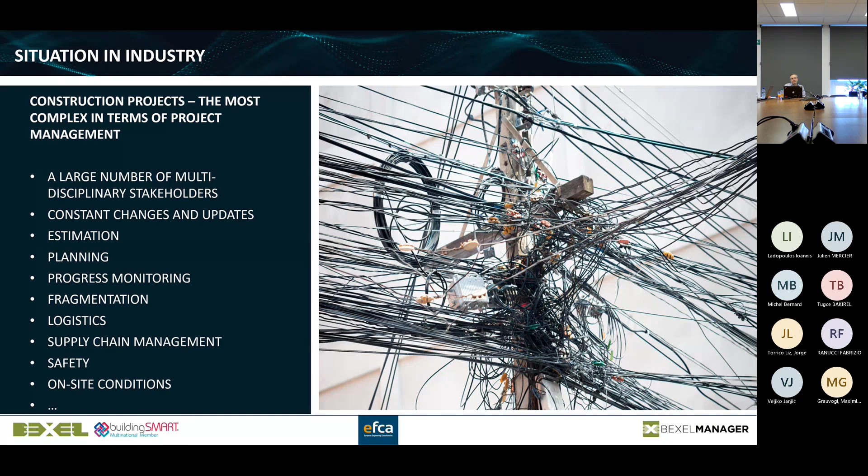And because of that, today, unfortunately, the construction industry is not very efficient. Not because engineers are not professionals, but because it's extremely difficult. Of course, any task could be very simple or complex. Let's say painting a wall is a very simple task, but to manage all these tasks, it's almost impossible.

Jeff mentioned Finland. So just one example of current productivity in Finland, and they are maybe one of the best countries in Europe and in the world in terms of efficiency. In one research they put sensors to see how efficiently workers are actually performing the works on site. And the number is, believe it or not, 15%. The theoretical maximum is around 70%, because there is always some waste, and that's where we are today.

And what do you mean? From 100% of work possible, they do only 15%. The rest is waste. There is certain work which is necessary for preparation, let's say you prepare your ladders for painting, or you bring the material from the ground floor to the second floor. There are certain activities which are not included there, but there are a lot of things where people are on hold.

So there are a number of reasons. More contractors at the same time, at the same location, long sequences of activities, wrong details. So you have to solve clashes on site. You need an additional elbow, so you need to wait a couple of hours for that. We always believe that drawings are not updated, the information sent to the site is not updated. So a lot of things.

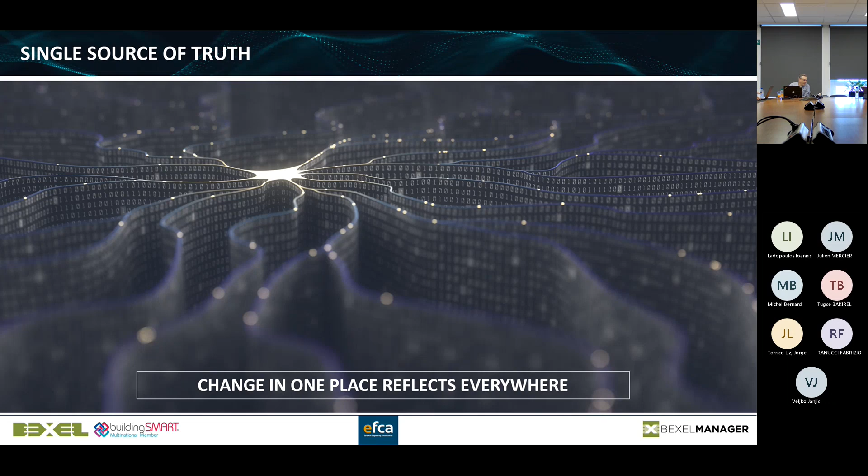There are a lot of bad things about this, but I would like to move forward now and focus on the single source of truth concept, where we are today, and what the challenges are of today's risk management, insurance, contract management and so on.

So this is now... yeah, now you can all see there is a lot of text here, and I just want to say that these are the last two slides I have with a lot of text.

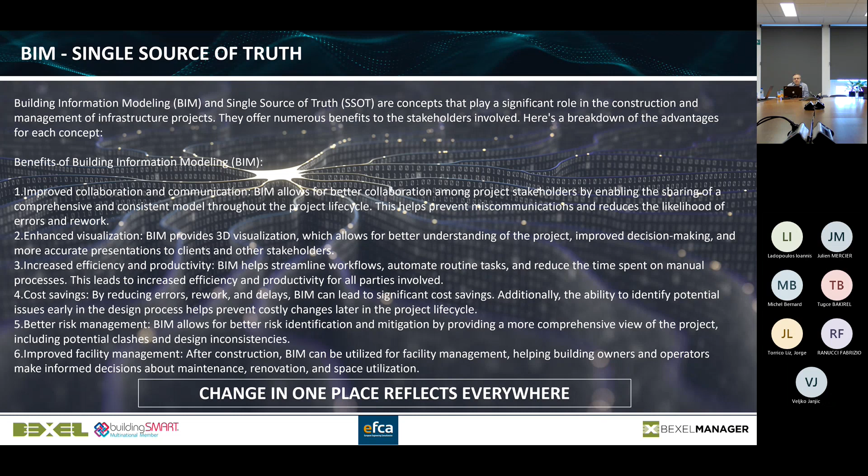So what are the benefits of BIM and single source of truth? There is enhanced visualization, improved collaboration, cost saving, better risk management, and a lot of other things. Both this page and the next one were actually not produced by me, but I asked ChatGPT to tell me what it believes. I was surprised that even ChatGPT mentioned a lot of things which we all honestly believe will help us if we have a single source of truth.

First of all, they said BIM and single source of truth use almost the same concepts, and this is very beneficial. He also mentioned data consistency and accuracy, streamlined decision making, reduced errors and rework, enhanced collaboration, simplified data management, and improved auditability and traceability. If I can wrap it up, I'll say if something is coming in a proper format from a single source of truth based on a proper workflow, I will trust that data much more than if it's coming from even a good engineer who just signed off that it is okay.

So just to give you an example about document and data management: even 30 years ago, we had a workflow where I, as the main engineer, should sign that all drawings are coordinated, and I'm formally liable, and it's okay. But what is the possibility that I'm wrong?

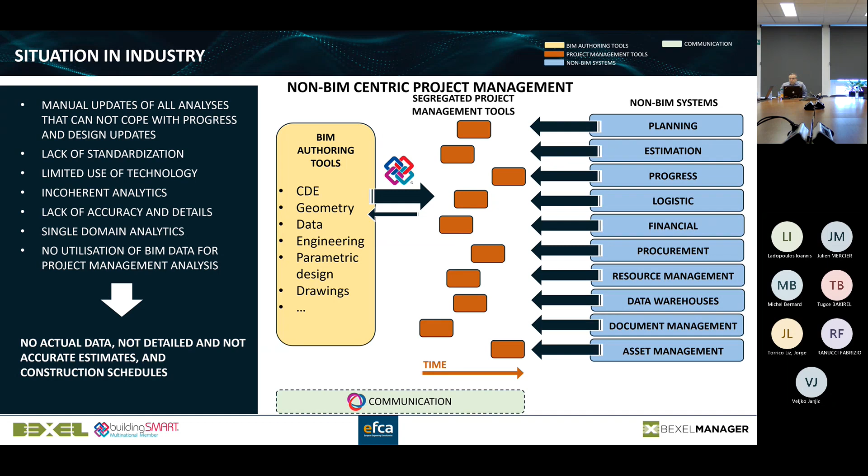The idea is to have, as much as possible, unified tools where most analysis comes just in time from this enhanced system - not necessarily just BIM, but from a single source of truth. What does that mean? Whenever you update something, it's immediately going to update all respective analysis.

The key question is... You mean, sorry to interrupt, just to follow - you mean all aspects are immediately together in the same model, they stay active? Because you have different time frames - procurement is later than pre-design, then you have the planning, other aspects, the documents they refer to - that all stays together? Is that what you're saying? Yeah, as much as possible.

So the key question is, do we know if we are talking about a single source of truth or not. If you change something - let's say add a sprinkler on the ground floor - the key question is: is the clash detection going to be updated? Is the data check going to be updated? Is the bill of quantities going to be updated? Is the cash flow going to be updated? Is the resource management going to be updated? Even the drawings - if all this is updated, we are talking about an ideal single source of truth.

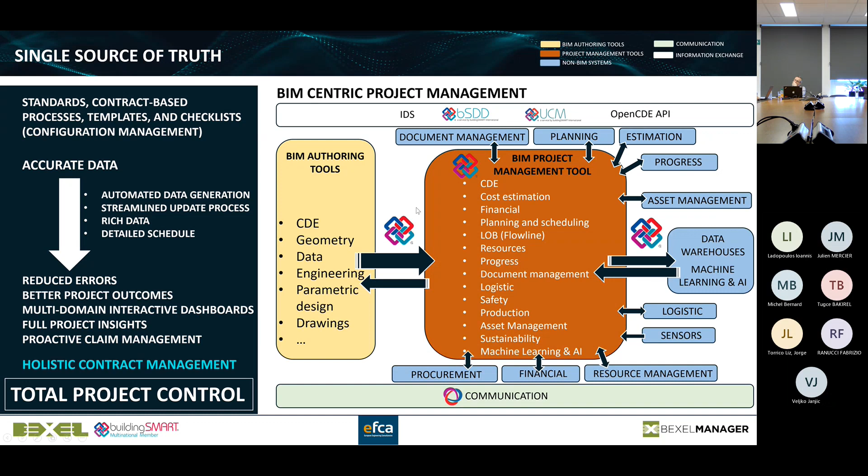Of course, can we always have everything? No. But today, this is not too expensive. Of course, we cannot solve everything, but if we can get 80-90% of the most important things for us sorted out this way, we are winners. And the truth today, unfortunately, is that we don't have those approaches too much. I'll give you an example of the other challenges and how this could be sorted out, so at the end there will be some solution, which is good news.

First of all, how do you evaluate the value of data based on the workflow? I personally always ask: what is the workflow and how is this data generated? I carefully listen to this, and based on that, I say, okay, the risk is this.

The second important thing is, when something changes - and this is always happening on a project - how fast can I have the new information. It's like cost estimation: my cost estimate maybe is brilliant, but when I update something, I will never have updated information. I said, okay, this is a huge risk for me - I cannot have additional works, claim management, and so on done properly. So in order to have successful systems, we need timely information.

So the rule of thumb is how fast we can produce the information. The value of information, if I have it today, is 100. If I have it in a week, it's 30. If I have it in a month, it's 10. If I have it in 2 months, it's 0.

And that's sometimes even negative, because if in 2 months I realize what I did wrong, I could even be disappointed because I know why I received that information late. So what should be done, I'll explain at the end what we can put in the contract. Luckily, a lot of these things could be put in the contract, in the scope of works.

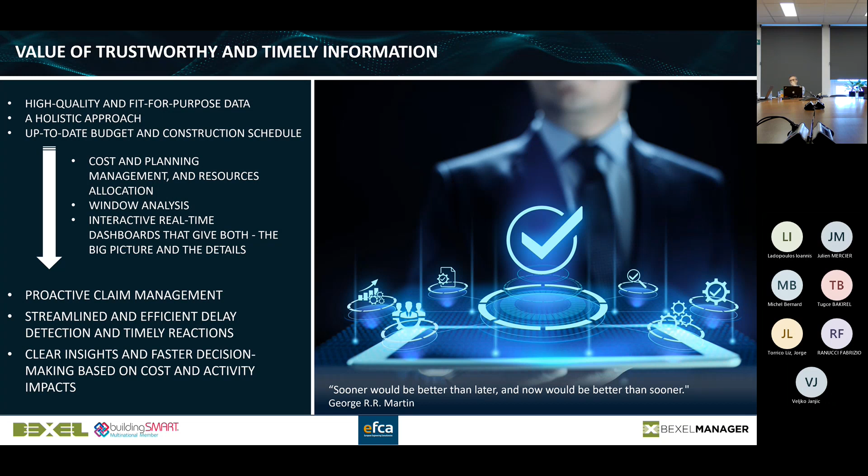What is also very important, in order to have timely information, is to have as much as possible machine readable requirements and as much as possible automated workflows. Without them, it's simply not going to work. So I can give you an example.

There's a project in Norway where we are also involved, a large infrastructure project. Every Monday morning at 7 a.m., they update 1,000 IFC files in 11 projects without even opening software, and produce a clash report, data check report, dashboard, and bill of quantities. For me, this is end of the game. If we can have those processes, then we could focus as engineers on intelligent things.

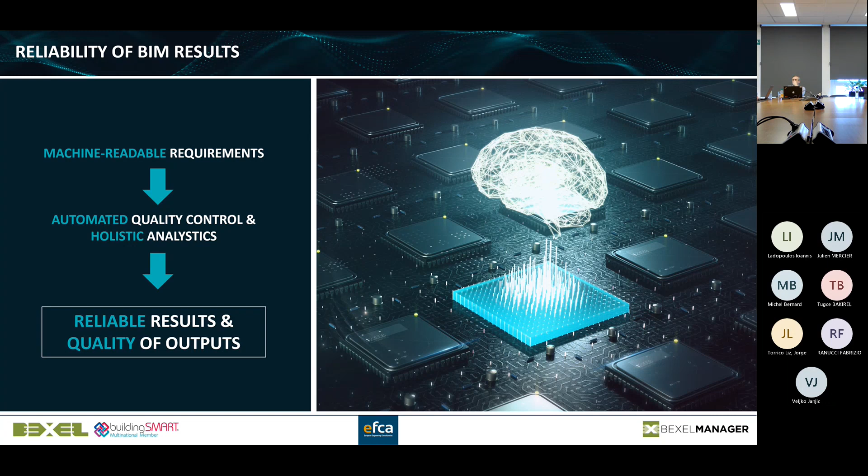What is also an opportunity is that some of the clients and designers who adopt some of these principles I'm mentioning now gain a significant advantage with the clients, because they trust them much more, since they simply have much better control.

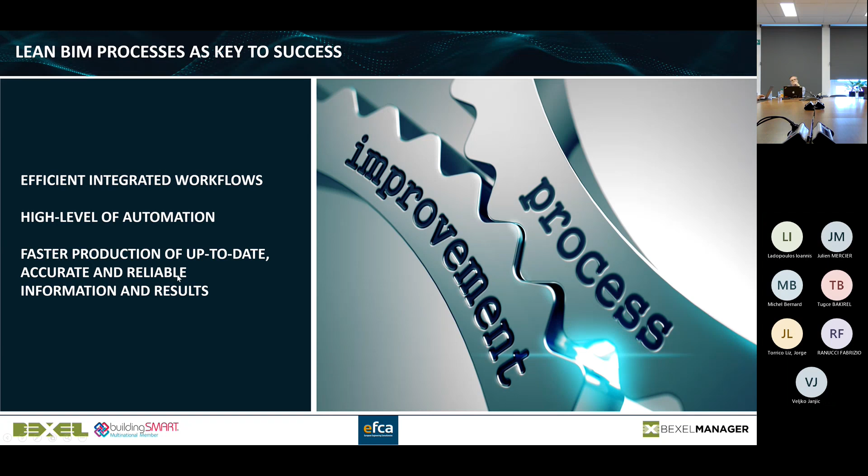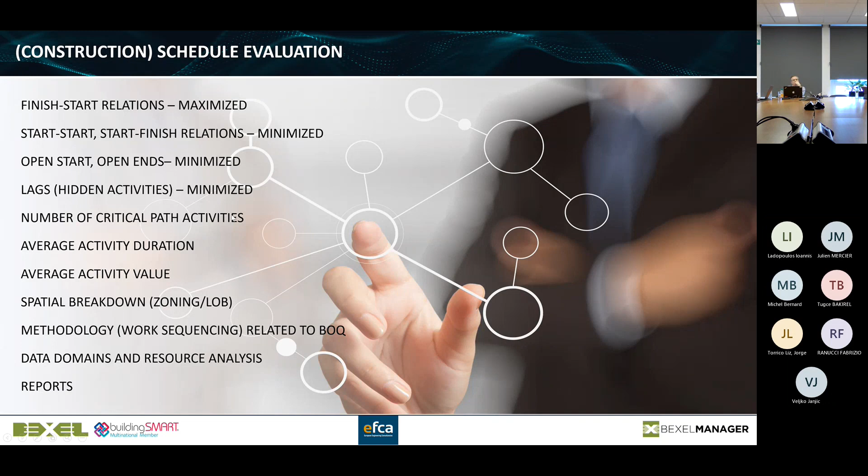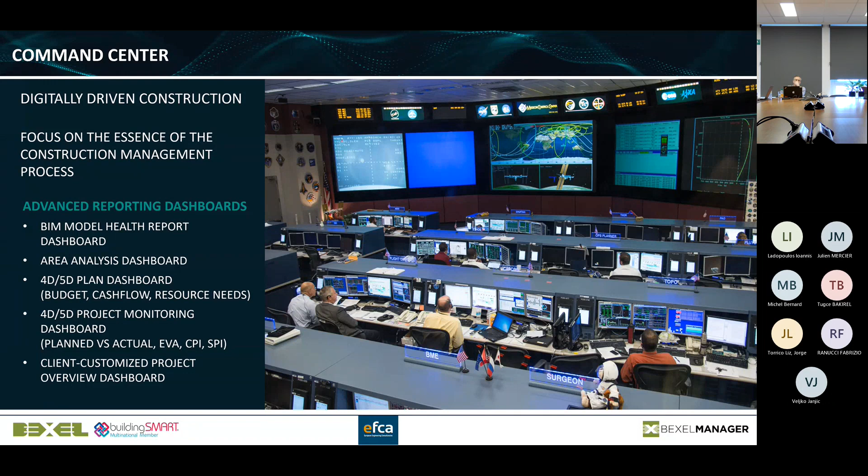So now let me show what we have to do in order to have this. These are the ways we can automate. This is an example of how a construction schedule can be evaluated automatically, and so on. These are the ideas for certain dashboards produced in a timely manner for the client.

So to give you an idea of what can be done: first of all, can we share all the single source of truth data at the same time to everyone? It's not going to work, because the performance of those dashboards or analytics is going to be impossible. The performance is not going to be there.

The second question is, do I really need to look at everything at the same time? No. So that's why, based on the entire single source of truth, the idea is to automatically create subsets of the data I would like to deliver. For example, if I have a huge building, maybe I can say just a substructure area, or parking area, for clash detection purposes.

One example we have now in Slovenia: let's say 40, 50 kilometer tunnels. We don't want to analyze all of them at the same time, we don't even want to load all IFC files at the same time. This is a common misconception - we just load one tunnel and analyze it. So first we define what are the spatial subsets.

The second is the property subsets. For example, today we originally load entire IFC files, and with this we analyze hundreds of properties, but maybe for a certain analysis we just need 10 of them. We can define which properties we would like to analyze. The third is systems - maybe we would like to analyze just structural works, so why load all utilities as well?

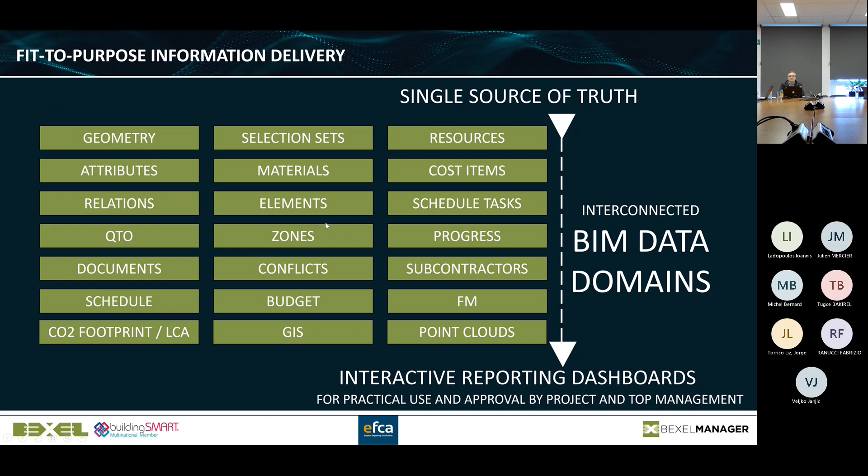And last but not least are the data domains - clashes, and I will show you now all the data domains available: geometry, materials, element zone, facility management, carbon footprint, schedule, documents, cost items, you name it. These are everything which exists.

And here are the dashboards - I'd like to give you a glimpse of how these dashboards are produced, and I'll show you live maybe one or two examples of how it can work. In this case, for example, we are doing a property data check. We would like to see if certain mandatory properties are really in the project.

We can just define the subset of the models we would like to analyze, not necessarily the entire project. Then we can automatically run this data check and see, with green, red, yellow, or purple color, what data is missing. The idea is that you can have that dashboard immediately, let's say at 7 a.m., and know what's happening. You can define which buildings and which systems you would like to check.

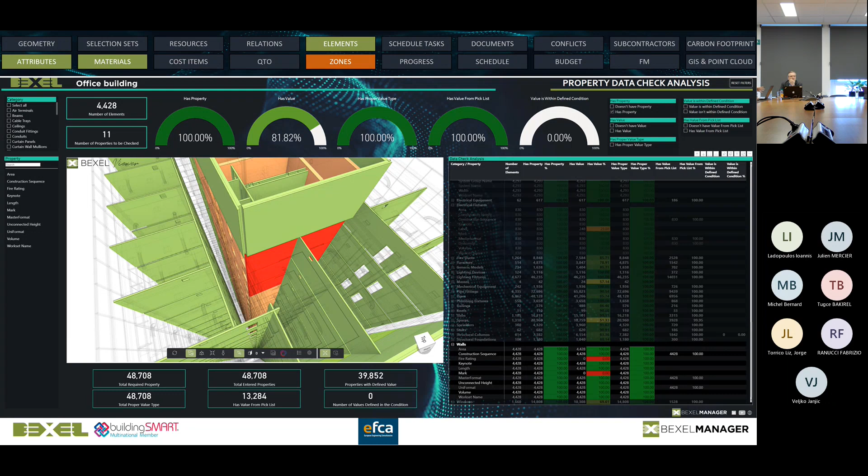And the idea is that in the future it is not going to be mandatory to sign the document, but to sign or to approve the dashboard. So that gives you much more possibility to control. On the other side, it also gives you a requirement to analyze certain things in a slightly more professional manner. The same goes with area analysis.

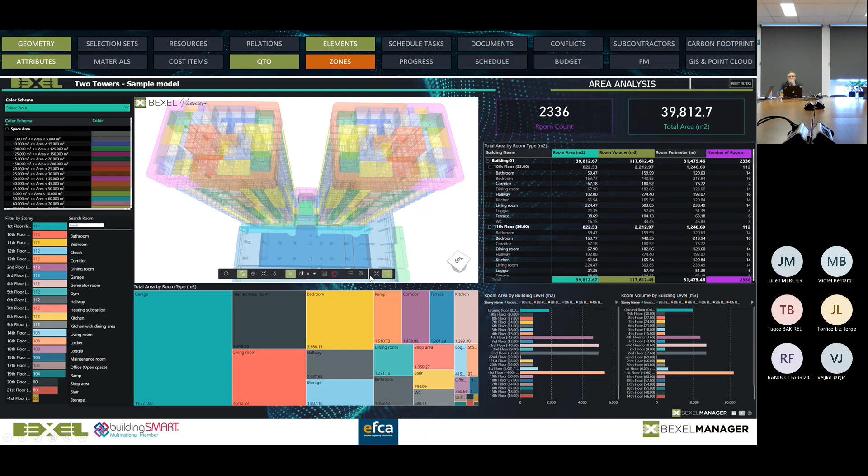So we have building floors, different room types of the project, various color coding schemas, and we can immediately see the areas and analysis of the last version of the project. The third one, quantity takeoff. These are utilities. I can have various color schemas, slabs, work sets, and I will show you live in a couple of minutes.

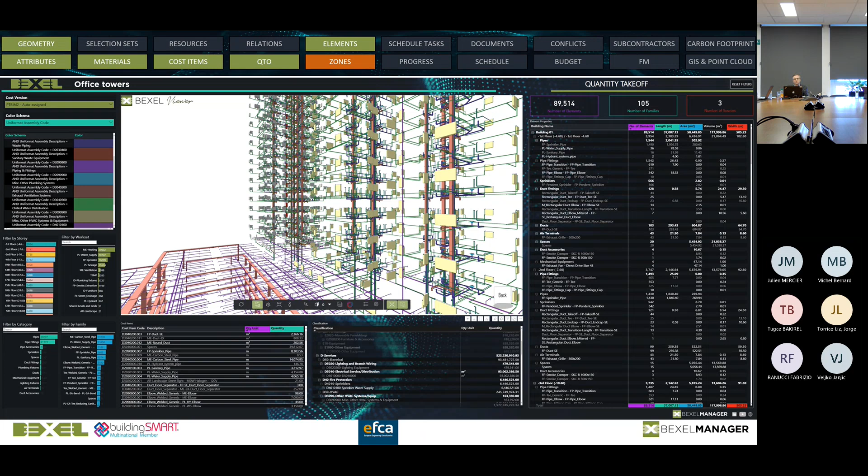So you can play around with this dashboard, but you know that this is produced today, and it has to be approved. This is the latest version of the detailed design phase, and this is the subset of the data you have to approve. And of course, this is clash detection.

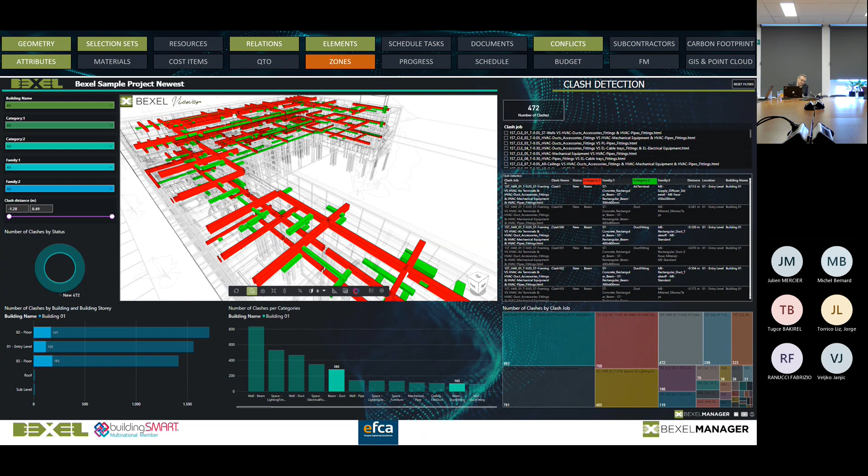So I don't need to have, as a user, a clash detection tool. I need to see a dashboard. If I'm the supervisor, if I'm the client, I just need to have a dashboard. We are talking not about the tools that produce the data, but what presents it. So again, this can be done automatically, and again, we are winners. And I have to say, a lot of tools have these automation modules today which allow you to do all these things automatically.

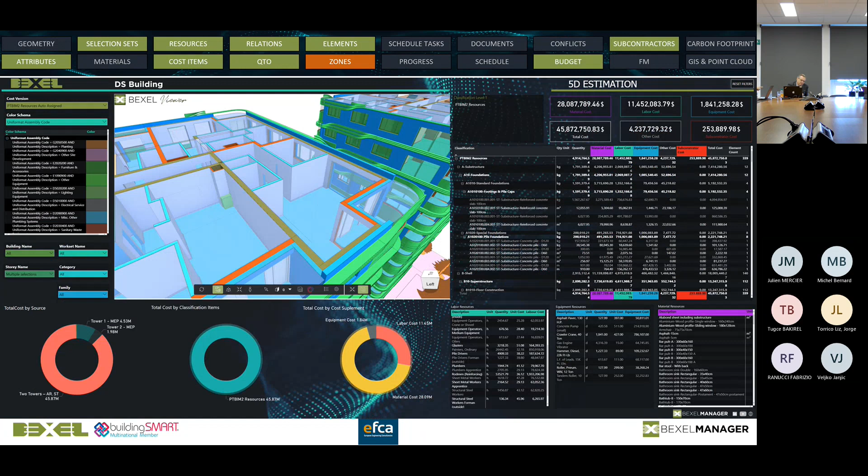The next thing is the estimation. I will maybe show you live the difference between a traditional cost estimate and this cost estimate, where you can easily identify what can be done. This is progress monitoring. Again, this is an example where you can see visually what's done each month, isolate each month, and see visually all the bill of quantities done that month.

So if you have a proper workflow, and this dashboard generated just in time, you will trust this data much, much more than a manually submitted Excel document. So the idea is that this is what is now possible, and this is how the approvals are done. And then you can combine this according to any criteria: per system, per subcontractor, or any other way, and immediately see different dashboards automatically generated.

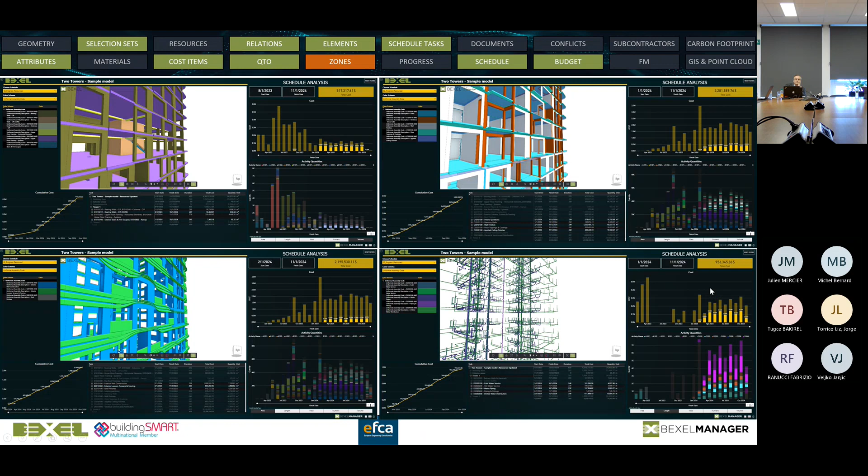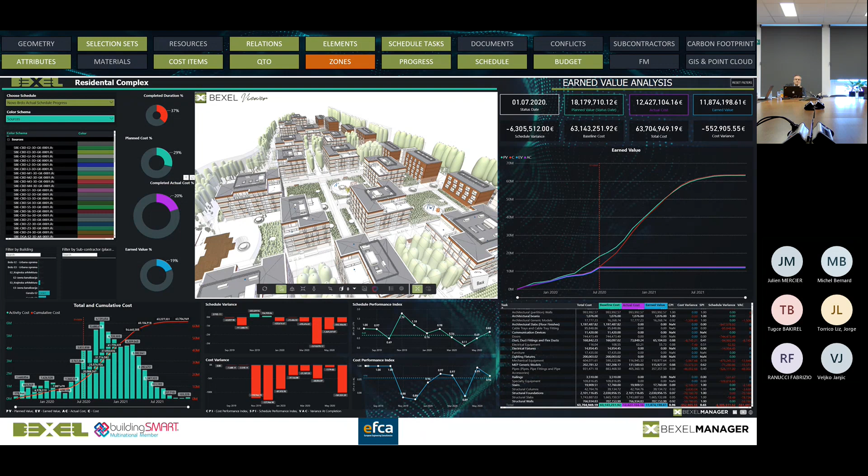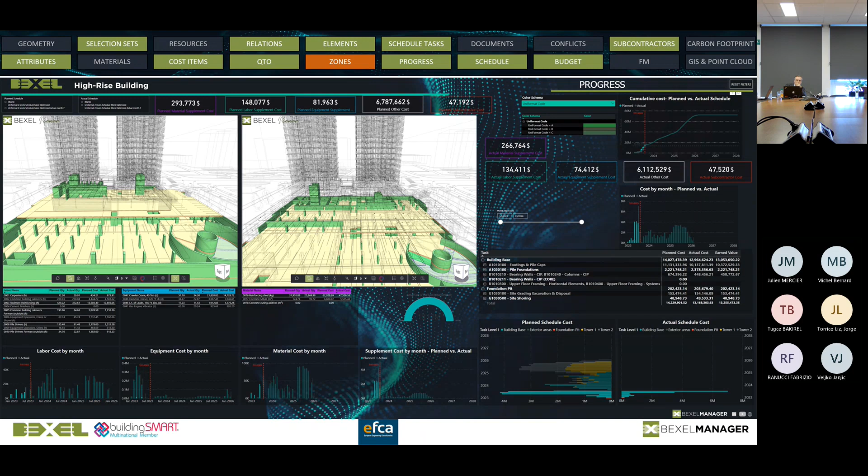And this is, for example, what is even more difficult, earned value analysis, where you as the client make profits, where you're losing money, what the expected cash flow is until the end of the project, and so on. This is a monthly payment certificate for a certain project, and this is a dashboard for planned versus actual. So the idea is that you can combine all this and approve them instead of just manually approving documents.

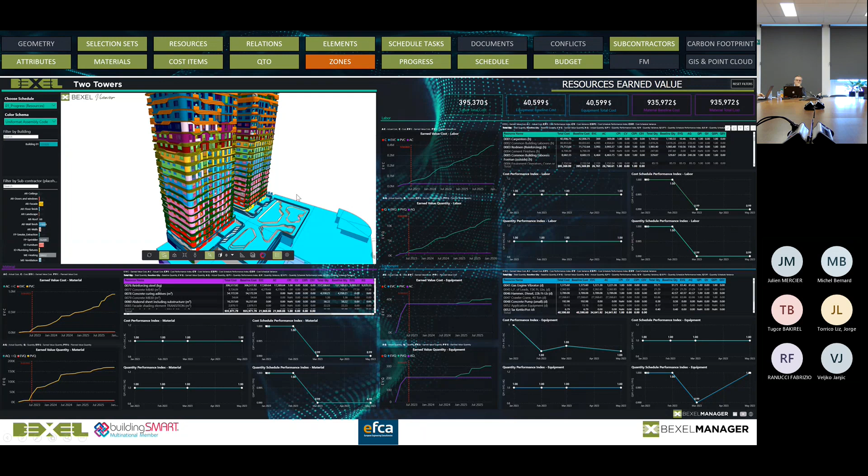And these are resources. So just to wrap this up, and maybe I will show you a couple of these examples. The key is who creates the data, how the data is generated, whether this can be done in real time or almost real time, and based on that, we expect lower risks and lower premiums in the future, because we will trust the data much more. And of course, there is a workflow and everything. So these are the benefits: effective process, lower risk, lower insurance, and so on.

So how can this be adopted? It is already done on a lot of projects with the proper scope of work and the proper deliverable formats, and the clients are usually on the safe side if everything is done in that manner. So before we go on, I will show you an example of certain items.

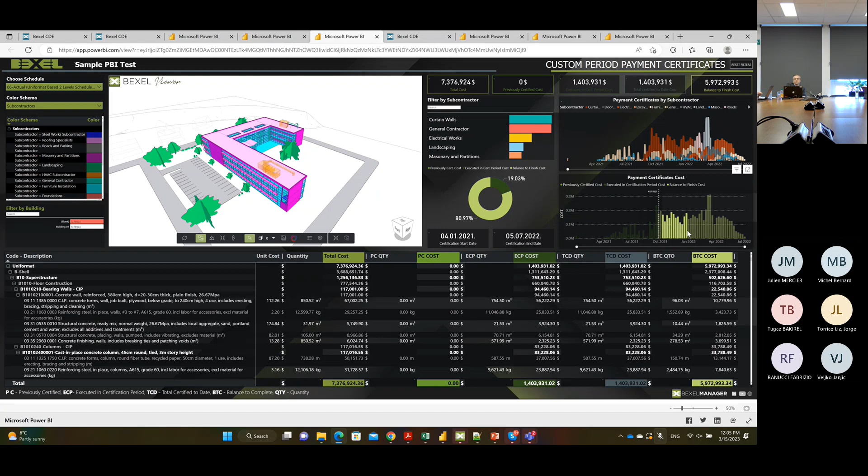So if I identify this each week, in this case just by clicking on one element here, I will see everything done in that particular period, week, day, month, and so on. I can visually see everything that is done. I can visually see the total amount of money. I can see how it reflects the contract.

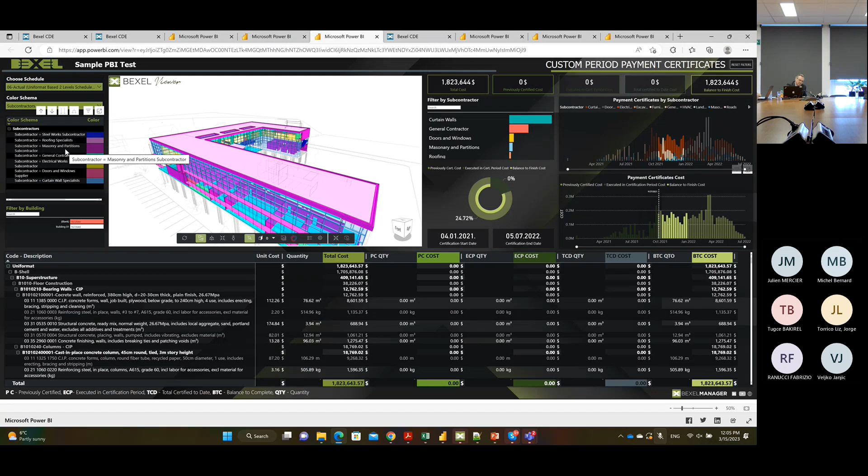And then if I want to see just what the masonry and partition guy did, I can click here and see his amount of money for that certain period. So if I have this, I can have immediate feedback, trust this data much more, and lower the risk.

The same goes with, let's say, this project sample from Germany. If I want to see how it is going, I can see per German standards, in this case category, I can see a color schema, and I can isolate any type of element I have in the project. Let's say I choose Fenster, for example, and the system will show me what is the cost of all elements here. So I can visually see them and see if I forgot something or not.

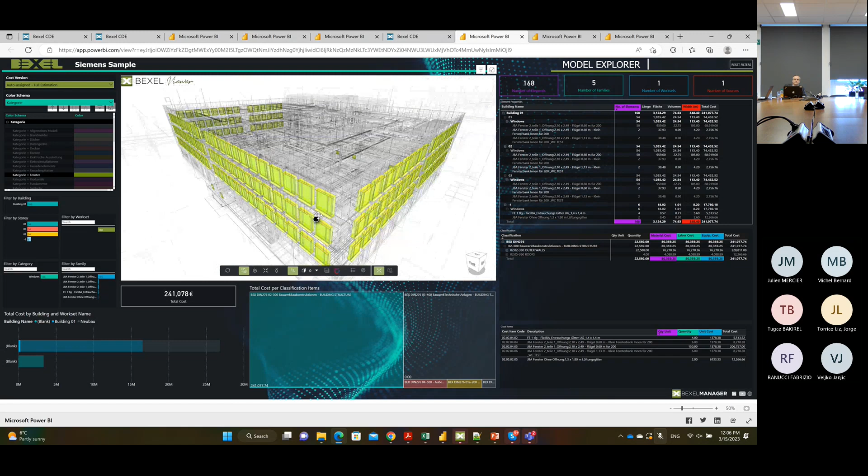So the idea is that with all this, I can trust the data much more, and I, as the stakeholder, am ready to pay the premium because the data is organized in a proper manner. The same goes for data checks, the same goes for property checks.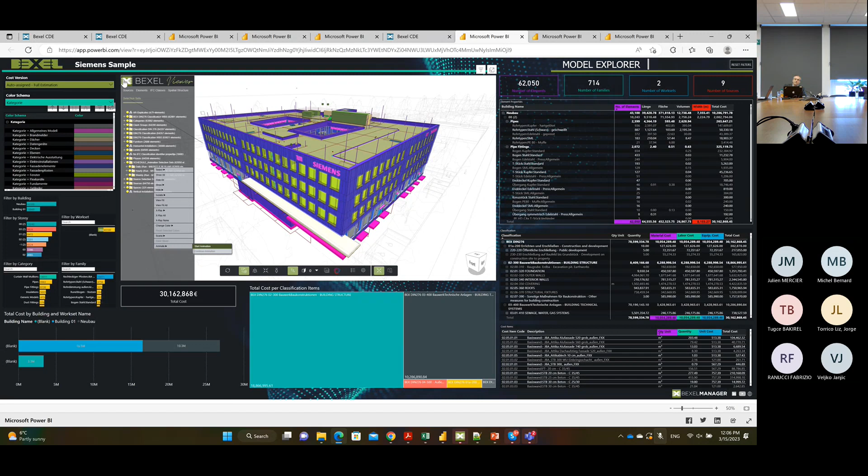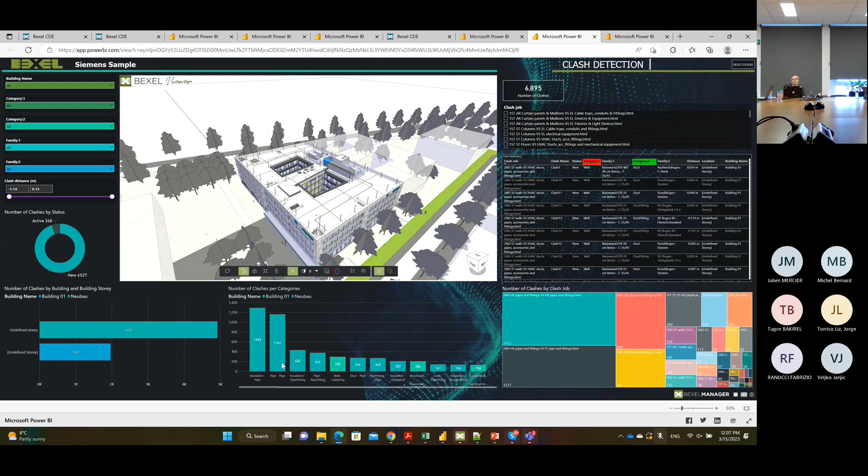Now I will show you, if the internet connection is good, a very smooth simulation. The internet is not great here, but live it's a very smooth simulation, so I can see how the project is going to be built. This is clash detection. I can see all the clashes in the project, per zone, per building level.

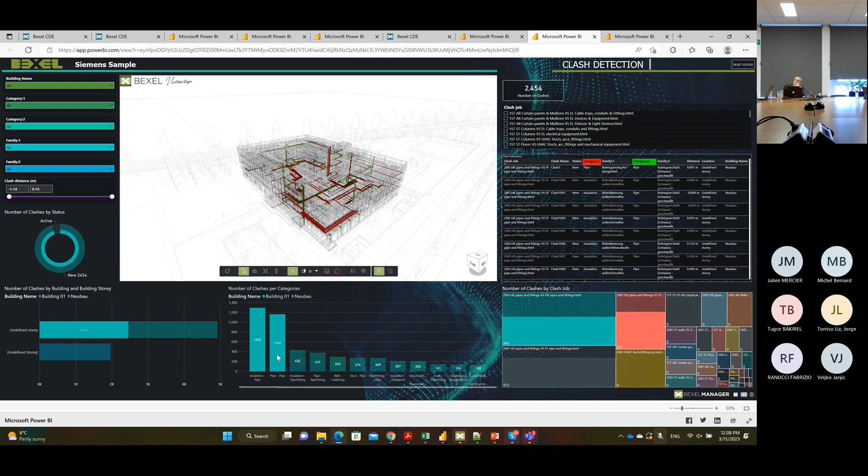So the idea is that if you can produce those types of dashboards and analysis just in time, you can trust the data much more, and the value of information is higher. The vision is, instead of delivering a single paper document or PDF, to deliver a subset of information, certain zones, certain data, certain dashboards, and that information has to be approved. The value for all stakeholders is much better. So this is the relationship between the single source of truth concept, risk management, and contract management.

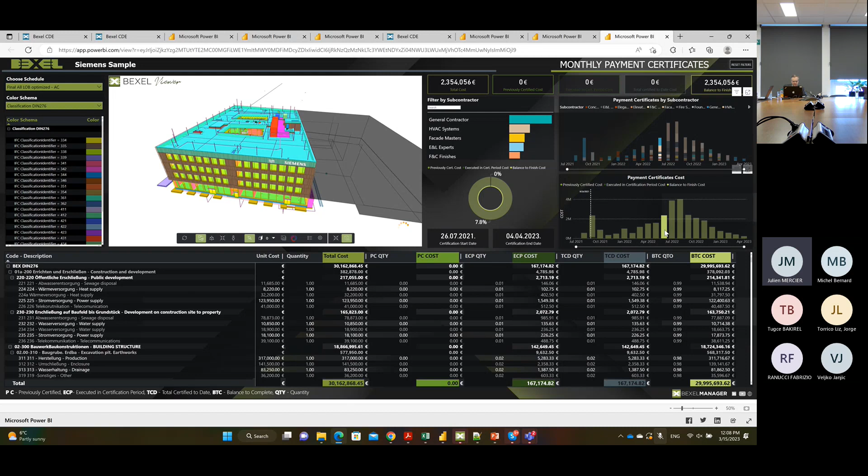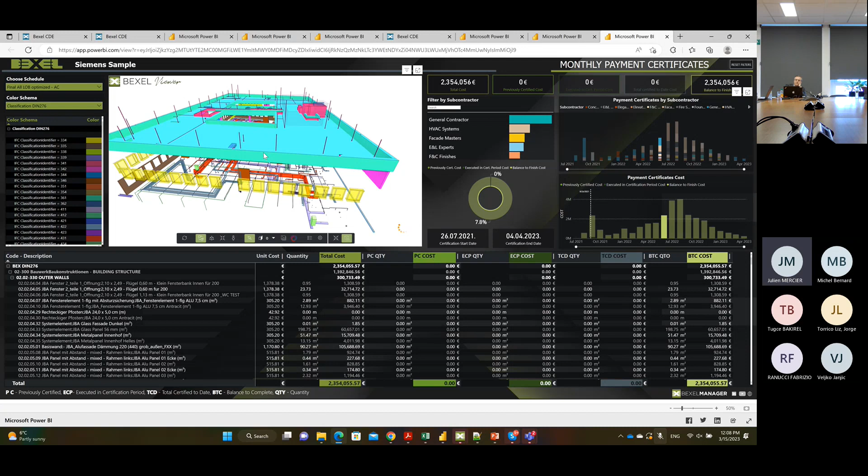So do you have any questions? Comments? Yeah, it's Julien from France. It's a very good product. We do the same thing, in fact. Did you use Forge? No, this is BEXEL, in this case the BEXEL viewer and CDE manager. So it's similar, maybe with some benefits, but more or less it's a BEXEL viewer. Okay, because you have to convert. In fact, you convert IFC files into a database, JSON or no?

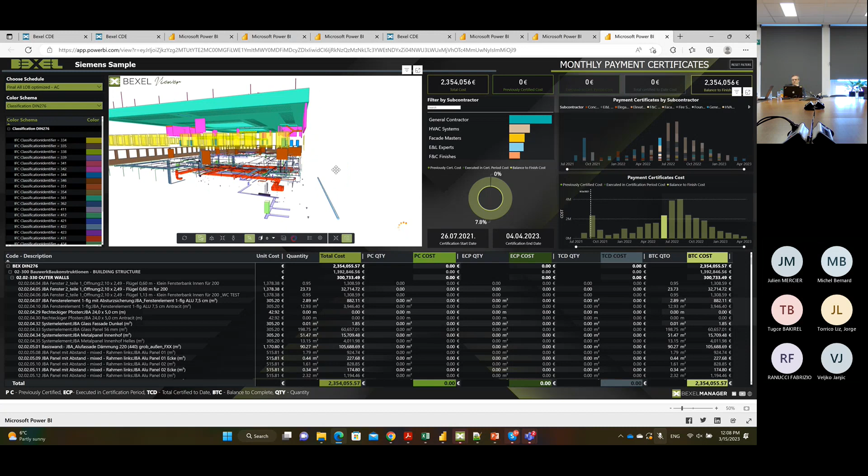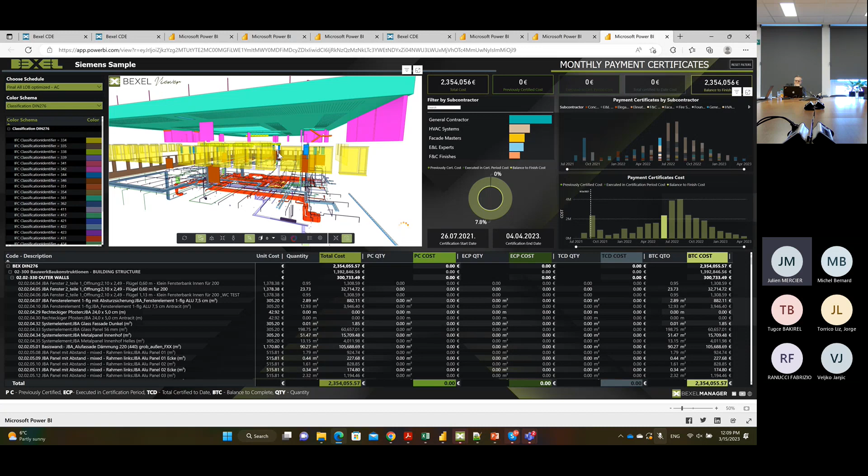Not just that. This is one part, but as you know, a lot of data is missing in IFC. So you need to combine various data sources, it could come from an ERP system or any other system. Unfortunately, IFC is not sufficient. Because, for example, if you want to query an IFC for spaces or properties, you need to convert it into a database like SQL or JSON and so on. You create your own converter? Yes, of course. We have our own, similar to what Autodesk or Bentley have.

Okay, and after that you connect it to Power BI, for example? Yes, the key is where the data is. In this example, Power BI was used because when you create this dashboard, Power BI automatically creates a very efficient OLAP cube with just a particular subset of information. So performance is great, and you can use this on our CDE, where you have a lot of projects, models, and so on.

The idea is that if you use Microsoft, in this case SharePoint, you can even define the workflow, so who is approving each of these dashboards. And if Microsoft Power BI is used, the benefit is that a lot of additional customizations of each dashboard can be done directly in SharePoint. But one way or another, the idea is that the data is fully open. Everybody could access it, and of course whoever owns the data has control over how it is used. Please go ahead if you have any additional questions.

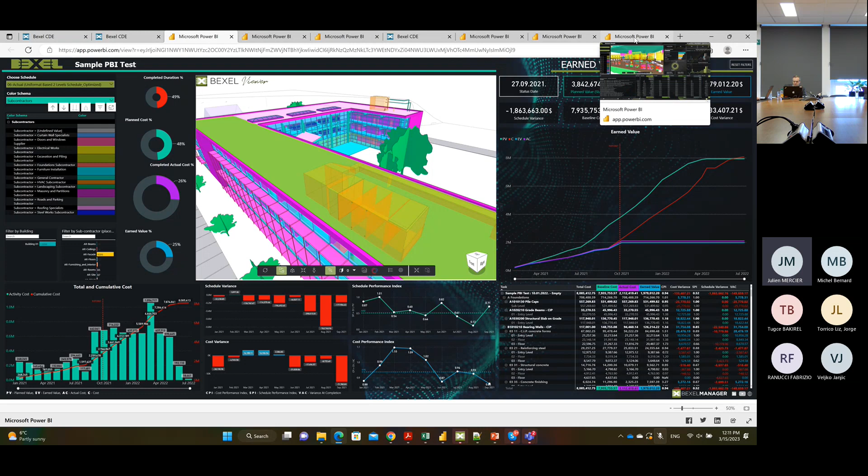I have another question, a very important point for us. It's to explain that a common data environment is not a common data environment. In fact, it's a common file environment because, as I say, if you upload IFC files into a CDE, you can't query all the data, and you need to convert them. And it's a big deal, in fact. In the common data environment, you just have a file and not data.

Data is very different from an IFC file. An IFC file is a database, in fact, of database objects. And it's very important to have all information, all data, with the relations between each element. Then you can do what we can see on the screen.

And it's very important to make the difference between IFC file and data. It's a big deal. Yes, that's what I use in my slide, that you define a subset of IFC files, subset of properties attached to them, subset of systems. So maybe you would like to see just structural works or MEP works or everything, and then subset of the data. So everything is the common data.

Unfortunately, today's misconception is that you have a viewer, let's say a CDE, which is just a basic viewer of the models, and then you have literally an added document management system, and it's called common data environment. Unfortunately, this is not true then.

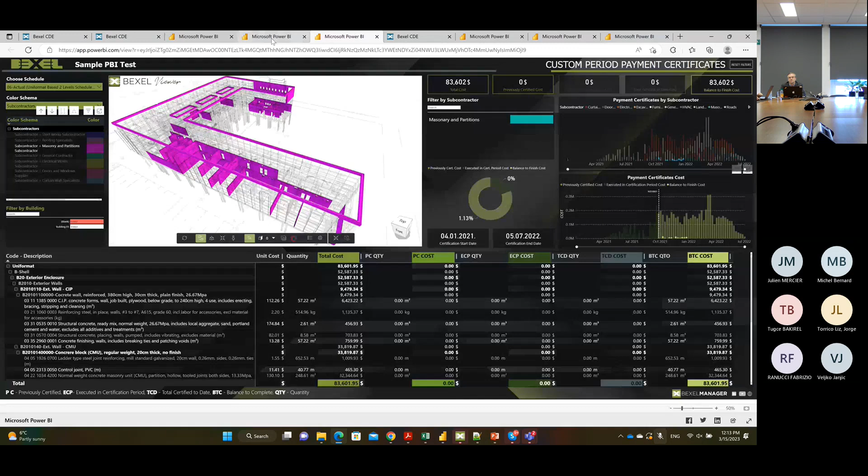Because what I wanted to say also, one example how you can test the accuracy of the data. So if I have any model, and I would like to verify how the data is generated, let's say I'm going to just find any of the projects here, just to go to the cost. If I click on the single element and I see its cost, in this case 18,000, I know that it is bottom-up analysis and it is very accurate.

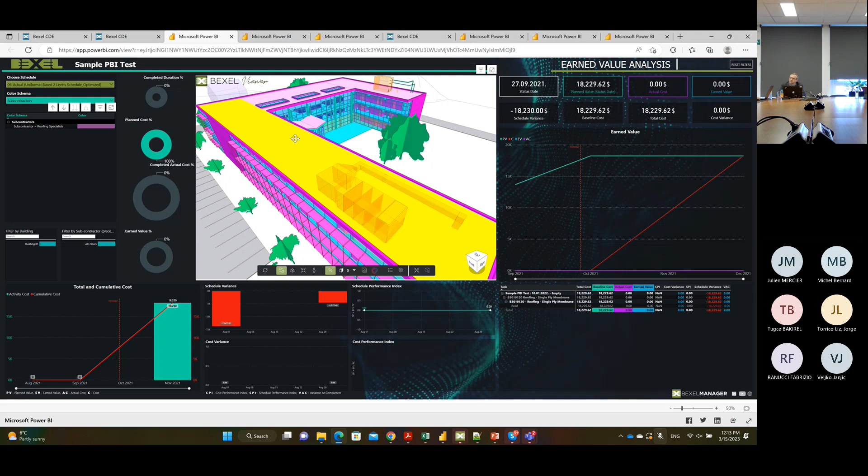If, on the contrary, those walls and windows cost 5 million, the accuracy of that information is quite low. So one of the tricks or ideas is that data should be attached to the element itself or to a minor group of elements. Otherwise, we are talking about a top-down approach where a lot of mistakes could happen. So this is an example.

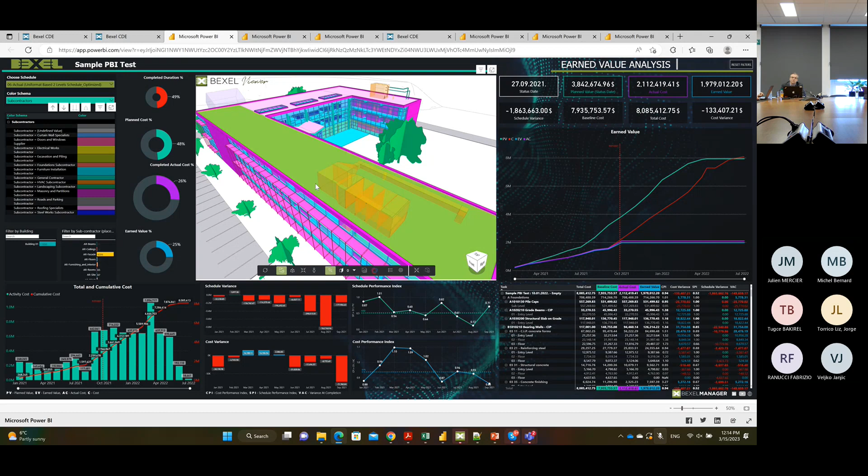So I know in Power BI you can combine any data, but the problem is how this data is generated. This is the key difference. So this is so that you can justify how the information is done. Otherwise, if you have, just go back to this slide. This is very important. So maybe you can answer this question to me.

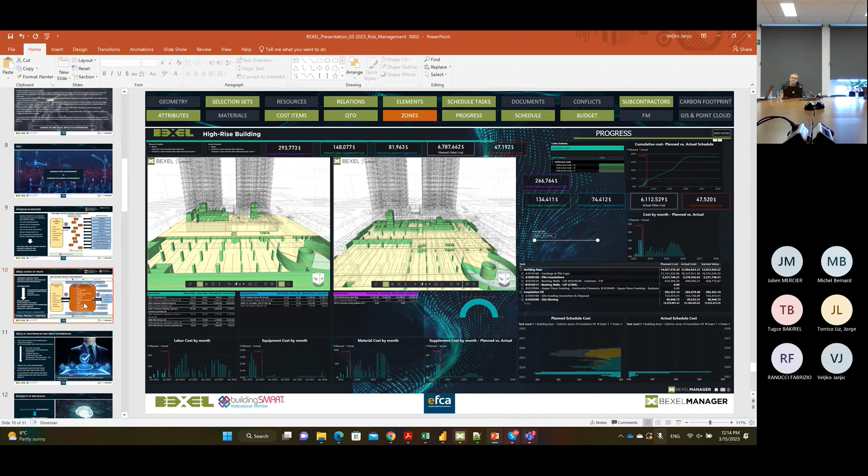So what is the system? You mentioned Forge, for example. What is the system? Is it this one or that one? So is the cost estimate created there, or opposite, is it created somewhere else and then simply connected to the BIM model for presentation purposes? And how do you approve a dashboard? What is the workflow? The workflow is suggested in this case.

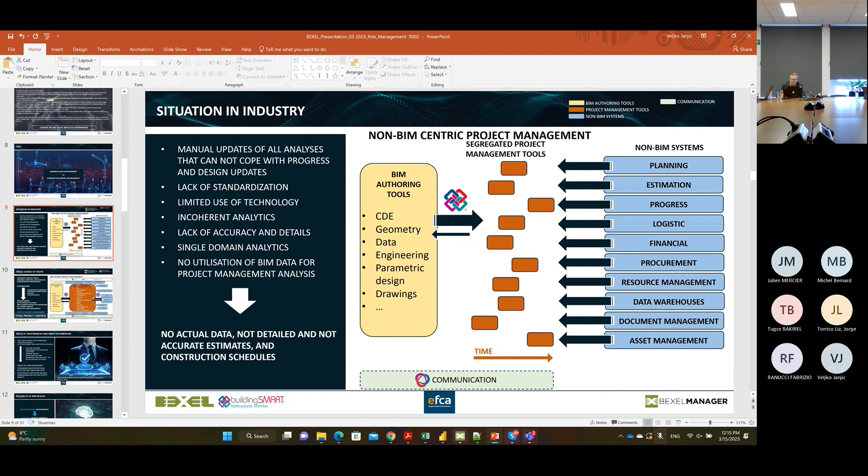This is not related just to our technology. We have the system in BEXEL, which is a document management system. So you can see who published the data for which version of the project, when it was published, what are the subsets which are used, and so on. But if you want to utilize the full benefits of this at the moment, the workflow will be to use SharePoint, and then in SharePoint to define the workflows. Okay. We plan, let's say by the end of this year, to have everything built into our system as well.

This is what, for example, Maximilian always asks. The key is also where the data is stored and who owns the data. So that's what we can discuss with Autodesk and with others as well. The vision is that there is always a possibility that data can be stored on the client premises or on the client designated premises. When I say client, I mean everybody who is using it. It could be a designer, a contractor, or the owner. Today we have the issue with some of the software vendors, which do not allow you to do that.

What is good about Microsoft Power BI is that Microsoft allows everything to be hosted on your premises. Just as an example, Saudi Arabia, they are extremely strict. The first question in every meeting in Saudi Arabia: can the data be stored in Saudi Arabia? And if the answer is no, then end of discussion. They don't even ask you anything else. And the good thing is that some of our largest contractors over there

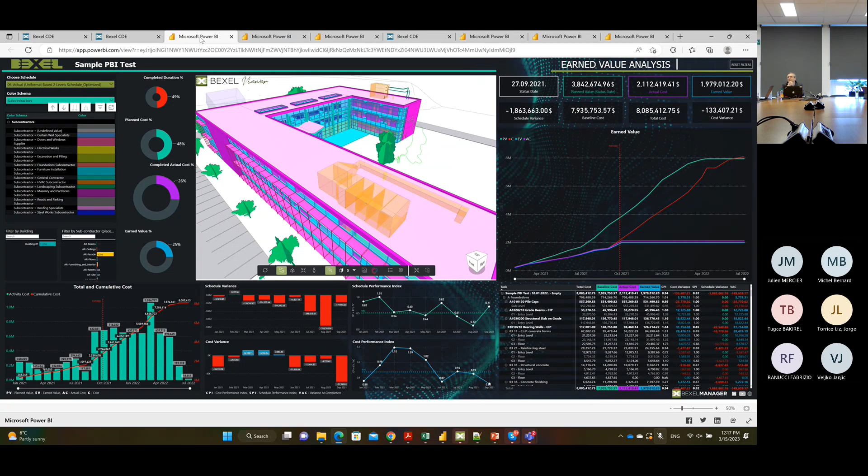I think it might be the new subway in Oslo. Sorry, yeah. My guys are there. I can double check. Okay, but I would argue it's not the software that's the problem.

I think it's how we furnish good experience and good ways of working from the large projects, which have the big resources, and funnel them to the smaller and medium-sized projects so they can benefit from the same development and way of thinking. It's not the software, it's people.

It's people that will not adopt new ways of working, because we do have the tools. We do have the knowledge. We just have to make people understand that that's the way of doing it. And also, I didn't agree with you saying you have to sign off on the model, because who's going to do that if that's the combined model of a lot of people?

But because the model is the viewing tool, I think all the decisions and everything behind the progress, who's building on whose information, have to be somewhere else. But this is a way of confirming that things are as you promise they are.

If I may, just to answer all the points you mentioned now. So first of all, to answer where this can be adopted: if the tools are complex, but the processes are automated and simplified, everybody will use this. If, on the contrary, there is an extremely complex workflow and process, and the cost is extremely high, nobody will use it.

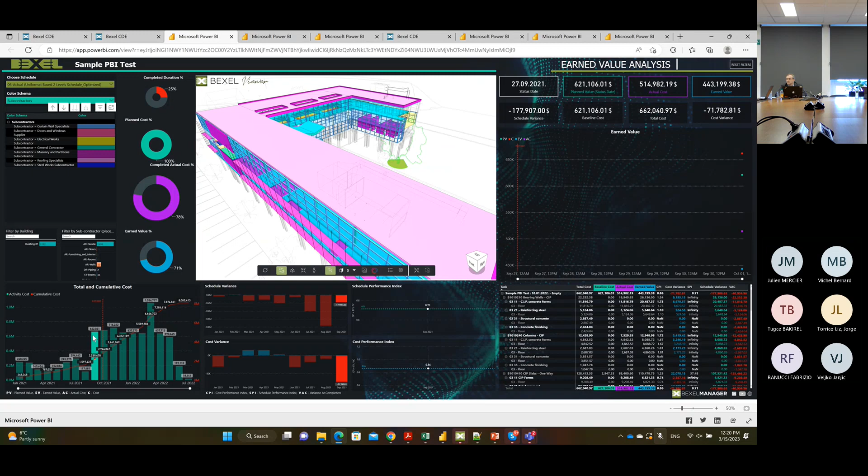He could see visually, for example, that the cash flow productivity was very low in the first year, and then it was expected that the next year it would triple the efficiency. And he said, come on, it's not realistic. And I said, that's a good point.

So I just want to say, maybe today this is a problem of the tools we have. They're primarily designed for engineers who are going to produce the information, and not tailored for the managers in those companies, and they still need to wait. So I'll give you an example with clash detection, a basic use case.

I talked with a friend of mine who is a designer and has managed hundreds of projects. And he said, still, when I ask what are the clashes, what are the issues we have in design, my guys tell me they need a month to produce one PDF for me, and then it's too late.

I have a feeling that those guys know everything, and I, as a top manager or president, cannot see this and say, okay, this is good, this is bad, or ask an additional question, because the format presented to me is so simplified and rudimentary. So the idea is that now top managers will be able to ask good questions: okay, but why haven't you solved those clashes?

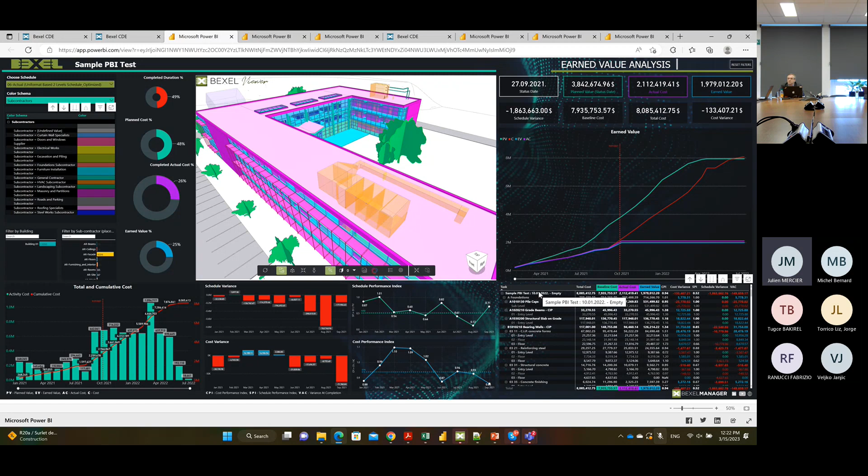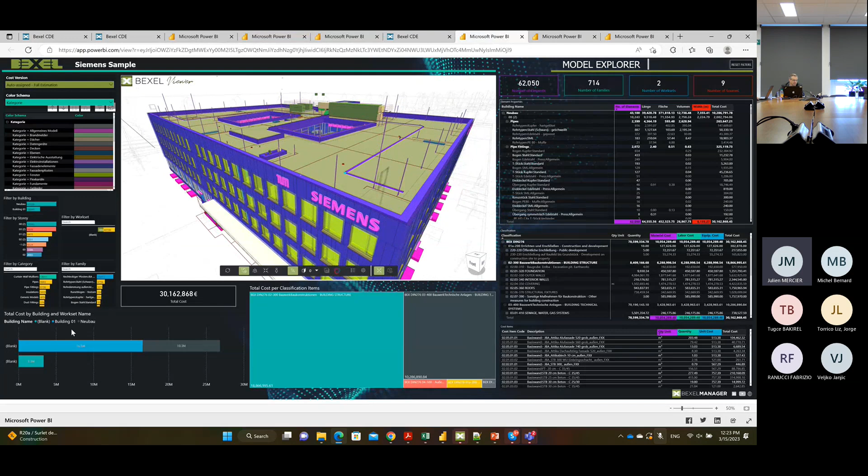I agree with you, because in France, architects and engineers don't understand why to do BIM, because you spend a lot of time, a lot of money. It doesn't make sense. With a dashboard like this, you create a lot of use cases, and you know why you create a BIM model. In fact, it is a database. If you just create a database and don't use the data, there is no sense.

With this kind of tool, you are able to use data to create a lot of use cases. And in France, if you show this kind of dashboard or interaction with data, architects, engineers, contractors say, I will do BIM because, although I spend a lot of time, I know why. Because it makes sense. I can show my cost, scheduling and so on.

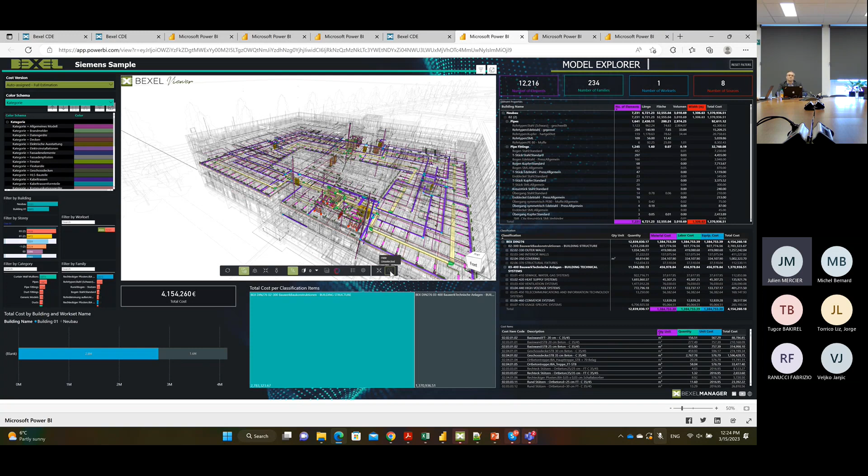And that's the point of BIM for me. If you just create a BIM model, there is no sense. You must use data, and it's a good way for me. I think, if I can have a reaction too, it's really nice what you can do with it.

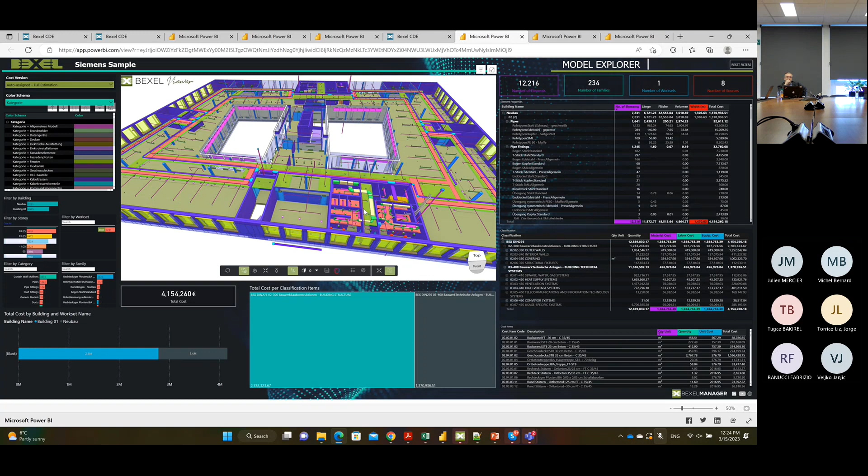I always try to go back to the basis of what we do, mostly in technical engineering and so on. I'm working on a very large project myself at the moment, where we also have these dashboards, and I think it's more sophisticated than the one we are using, but you always see a problem there, because first of all, it's based on the input and the quality of the input. Of course, with geometrical data, it's not subjective. It's really what is there, and you can do something with it. But the main problem, most of the time, is the quality of your model.

What we face is that, for example, people are discussing the clash freeness of models interacting, but they forget that a certain calculation of a certain design is not yet finalized, not yet done, and not yet approved or controlled, and that is totally missing. As management, these tools are important, specifically on larger projects, to have an idea from a management point of view: okay, what's moving? What is not moving?

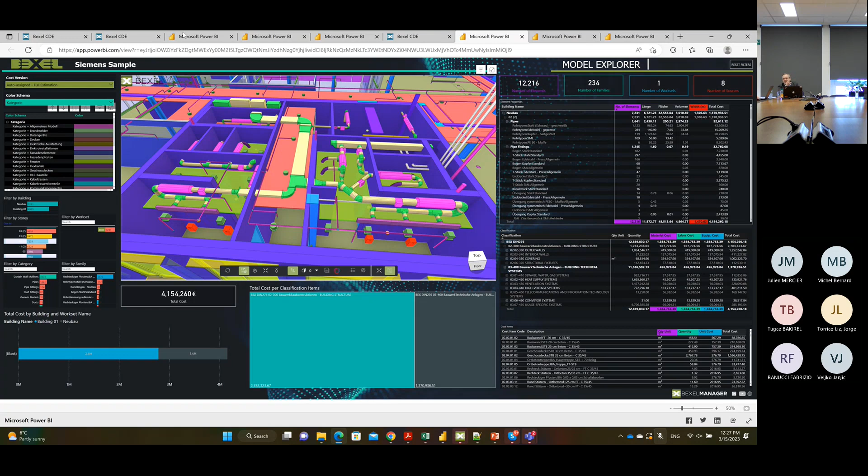Yeah, but I sometimes see that because you have different people and different software used, this information is very hard to bring together, all accurate at the same time. I'll leave the word to you, Ingrid. But you see this information is not always so accurate in the dashboards because of people trying to, you know what I mean? Yeah, of course. So first of all, this is why it is according to the workflow. So how do you bring it together? That's basically my question, if you say I have data management.

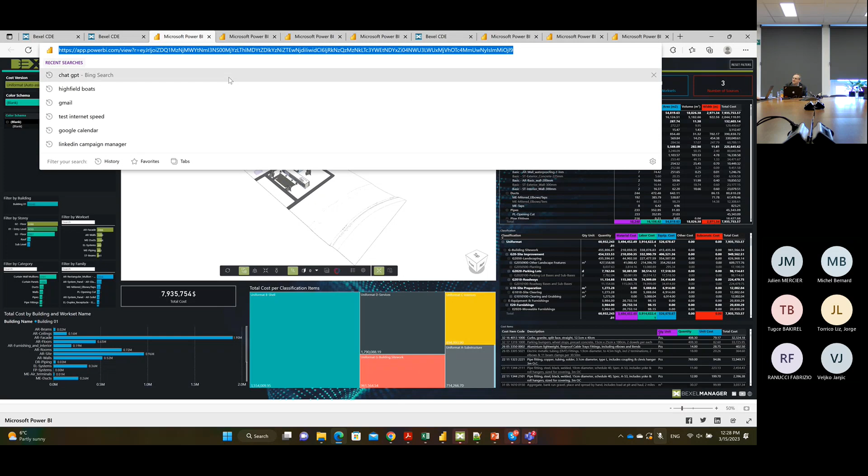First of all, I've seen maybe more than 1,000 different BIM models, and only once, in the Bay Area, a friend of mine, whom I'm not going to name, mentioned they did a hospital with full LOD 400. And I said it would be my greatest pleasure to go and see that hospital. And then he said to me, okay, do you know what marketing is? The same is with the clash-free model. The same is with 100% coming from cost. The same is even with this.

This is actually a sample project we did with Siemens for the Technical University in Munich. Of course, more than 10% of the cost and tasks are not modeled at all. It's never going to be 100%. But what is important is that you always know what is coming from BIM, what is done and what's not. What is always missing in any analysis is the small text before or after it saying what the analysis contains. You also rightly said for which phase it is, when it was produced, and so on. That's why this just-in-time dashboard is important.

So you say, okay, this small building cost me 7 million, that railway tunnel cost me 200 million. I know this is produced for all the elements in the model, but let's say the sprinkler is not modeled.

All other costs like equipment, side equipment, or trailers are not included. So I see 200 million, but this is not included. So I know what's there, what's not.

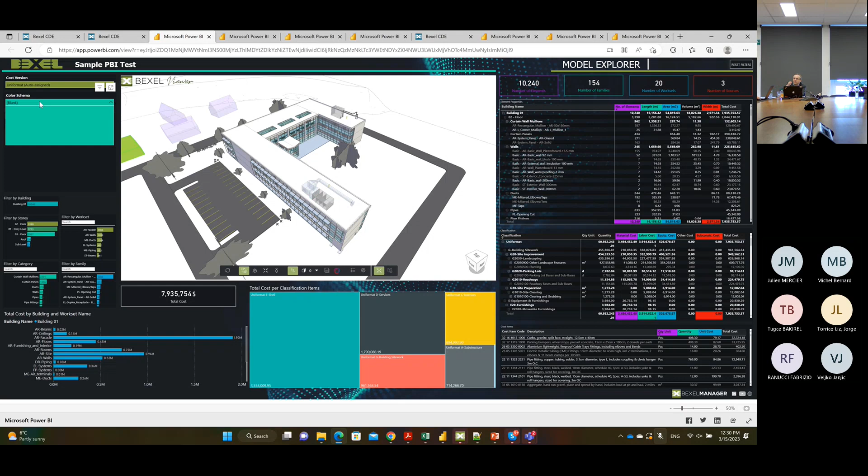If I may quickly add, that's a very good point you make, but just to emphasize what I actually want to say, because it's complex. When you talk about cost, for example, you have your cost data linked to your objects.

And for example, I had a pre-design where I had 500 cubic meters of reinforced concrete. We changed it, the model is changing because it's all a process. There is a cost related to that 500 cubic meters of concrete. Then it becomes 200 cubic meters of concrete. Just an example. The price needs to change too, but the person who needs to change it is not yet actively in there because there's a phasing. That's what I mean, that's not a single source.

It's not a single source of truth. Please, because this one has no value at all.

If you don't have that, you should have a lean production and design. A virtual design construction should be implemented, and also all the objects should have a parameter, LOD or MMI, model maturity index, which says I am a wall and I'm trustable because this is my final design, it's locked. Or this is, I'm a wall, I'm here, but...

You need to be beyond the basic engineering, that's what you're saying. No, it's because we have several systems, but the latest one which is catching on is the MMI, model maturity index, which says...

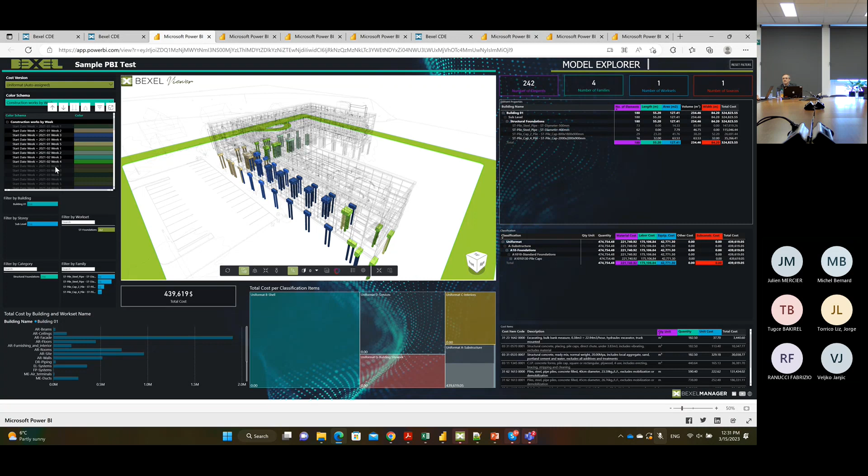At level 100, this is a pre-design, very pre. 250, it's early lock design. 350, finished. 600, built, or something, I don't remember, but it's a very fixed scale.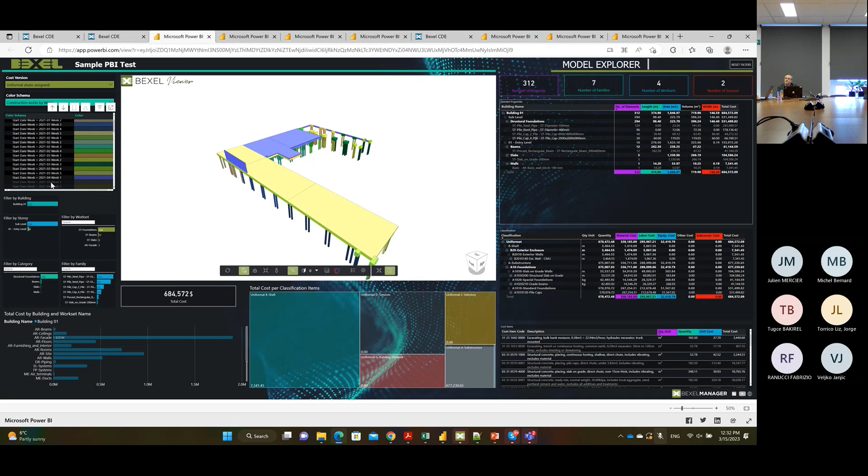So every object, then you would in your Power BI see how far this model is, how mature it is. This area is finished, it's built. This one, we're not there yet. So you can see by coloring how mature the model is.

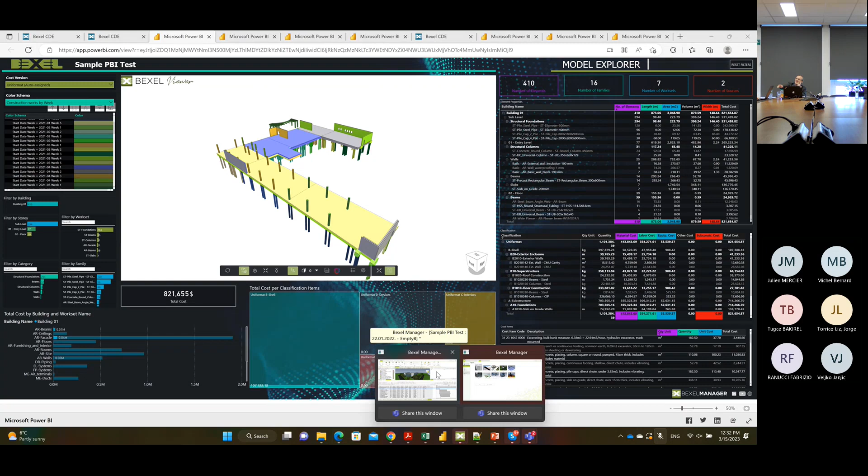You first have an engineer who thinks about the technical solution, but most of the time, the way I see it - I'm not saying this is the perfect world, but I'm saying it's happening like that - you have what we call a trade-off matrix that you make with several opinions. Then somebody starts moving in a certain direction during the execution phase because all the rest is moving.

And then the procurement is coming later on. That again gives a feedback. It's a whole process that sometimes takes months.

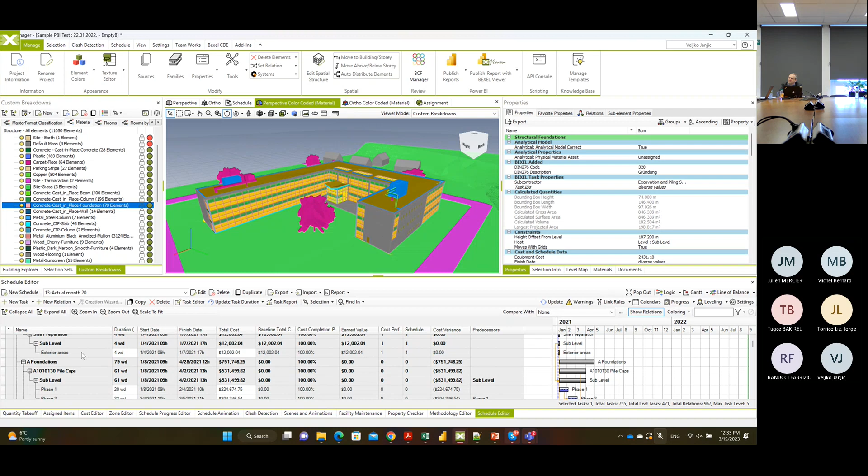Allow me, Ingrid, just to say, this is about what I mentioned about the process and how fast the information could be generated. So, if it's done properly, then almost automatically information can be generated.

So, for example, just to show you now, this is a clash detection. I can see all the clashes in the project, clash-free modes, whatever I want to see. And if I go here, I see all the clashes.

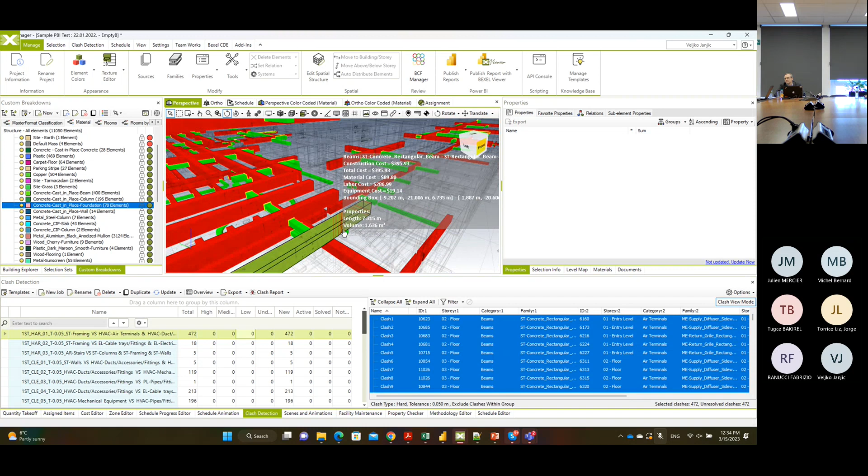And can we all agree today that we can do that more or less just in time? When we update IFC files, we just load the clash matrix. And you can use any software, Navisworks, Solibri, BEXEL, any other software can do that just in time.

So you will not say, but I need a month, my code is not updating the clash dashboard. No, it does that automatically. What we are having, let's say - this is about why the process is important.

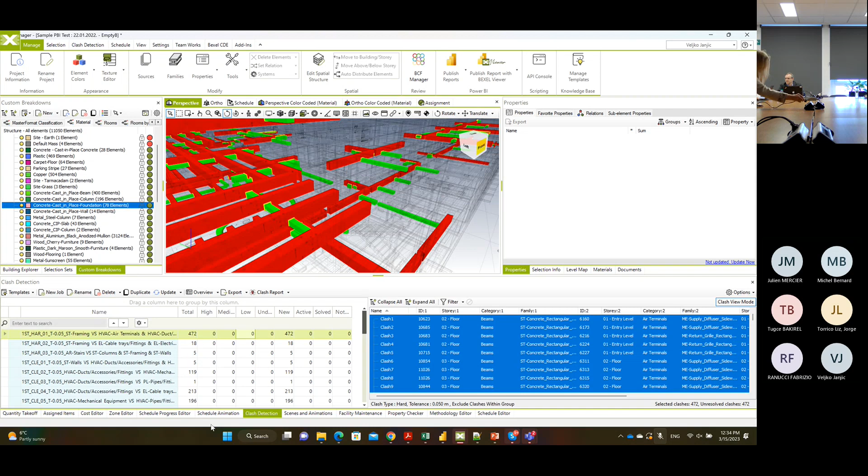So if we can go here, updated model, and if I go, let's say, create a new cost estimate, automatic. If the process can be based on the formulas and everything I have in a system, I can automatically calculate the new sprinkler or updated walls and have the dashboard automatic. You will not ask, but what if my colleague needs one month to do that? Because, that's what you should do.

If you say auto assign to new cost version, let's say, I will just show you here what is behind this.

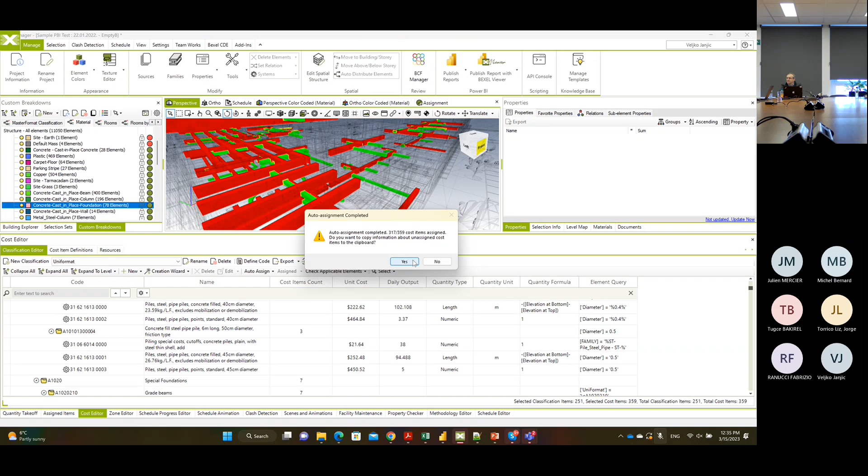The workflows allow you to do this automatically. If the data check has to be done manually, if cost estimate has to be done manually, if progress has to be done manually, you cannot have a single source of truth. And because you will manually do this, in this case, I now created, just to show that this is a new version of cost estimate.

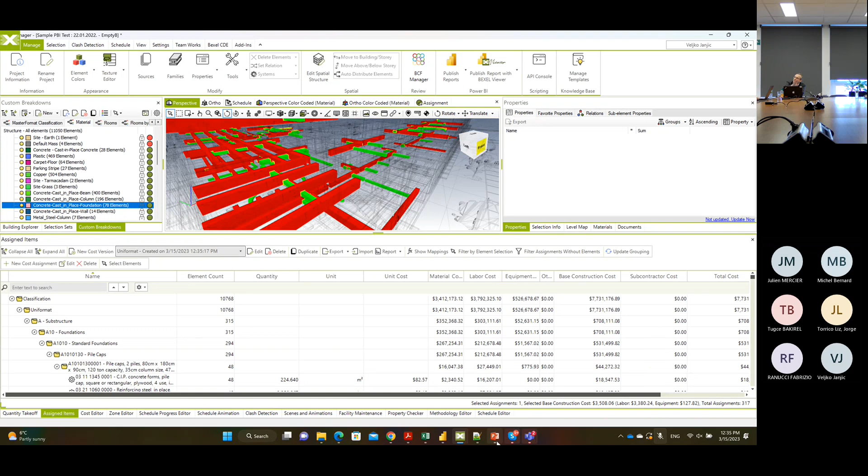So this is a BIM-based cost estimate, meaning the BIM is the basis. In Germany, for example, that's been a standard for 50 years. They have an extremely detailed way of doing cost estimates, always down to the single element. In some other countries, it's always top down. So why is this important?

Because the two things are extremely related, the risk and the traceability. If I can trace how the data is generated, and if it's done in a relatively automatic way, then I have just-in-time information and reduce the risk.

So whenever someone shows you a bill of quantities, my suggestion is your first question should not be whether 1,000 cubic meters is good or bad, but to ask them to explain how they created that document. The second question, based on what they say, if they tell you 'I do this manually,' you can respond: but this is preliminary design for a tunnel, so when detailed design comes, you'll again need 3 months to do that. So it's not a good process.

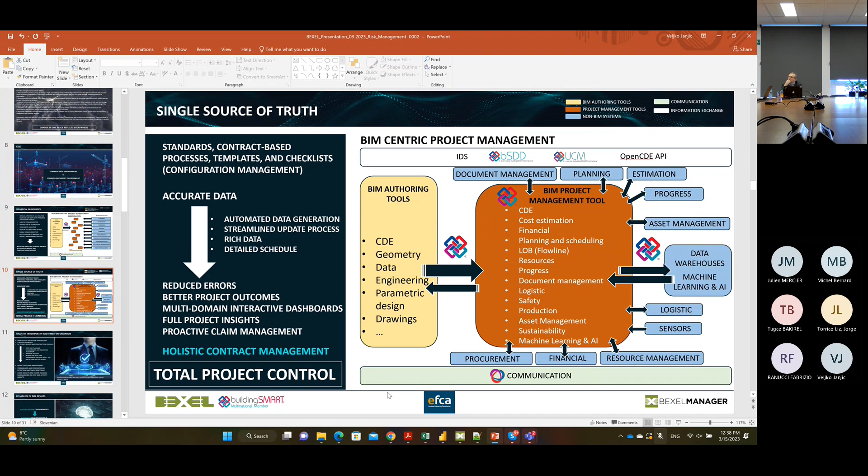Or double modeled it. But double can be prevented. In our system, or in Navisworks, we have a system which detects duplicated elements. So even 0.5% is less. If I have 10% of the cost done manually, my risk will be 10 times less than if I did 100% manual. You're right about quantities, there isn't, in general, too much discussion. It's mostly about unit rates, but that's a different thing.

You can add the margins automatically, or everything else. Just to give an example, I don't have the dashboard here, but you see two costs: one coming from the ERP system and one from the BIM model. You cannot imagine how different they are. Then you ask someone, what are you managing? You have invoices with items that don't exist in the project, and nobody noticed because it's like writing without spell check versus with spell check. Even if you are the best writer, you will make a lot of mistakes.

And this is about the process. If you have an advisor, even an artificial one, if I'm not a native English speaker, it will tell me, 'it's not too confident,' or 'you should use that phrase.' It helps me a lot. So the quality with this and without this is simply not the same. And the same goes for risks.

All right, I think we can move on. What is the price, Julien? The price per month for a middle-sized project, $10 million, just to have an idea?

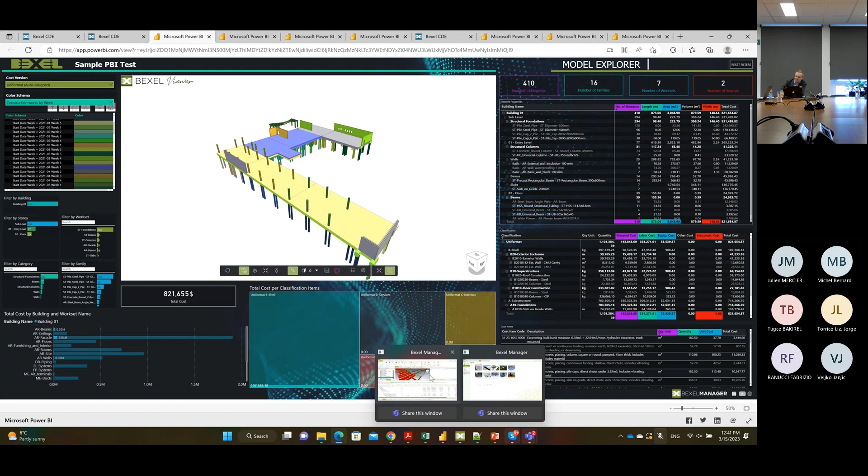Okay, I think that's the difference. The storage is not very expensive, just to tell you this. So everybody who is saying that because of the storage you need to pay more, again, not true. Simply the cost of the project and the storage of the data, again, not related at all. So simply what I honestly believe, you should pay for the tools, which is fair, not for the value of the project. So it's not so expensive, and you can use it on an unlimited number of projects. And it's a special price for EFCA members.

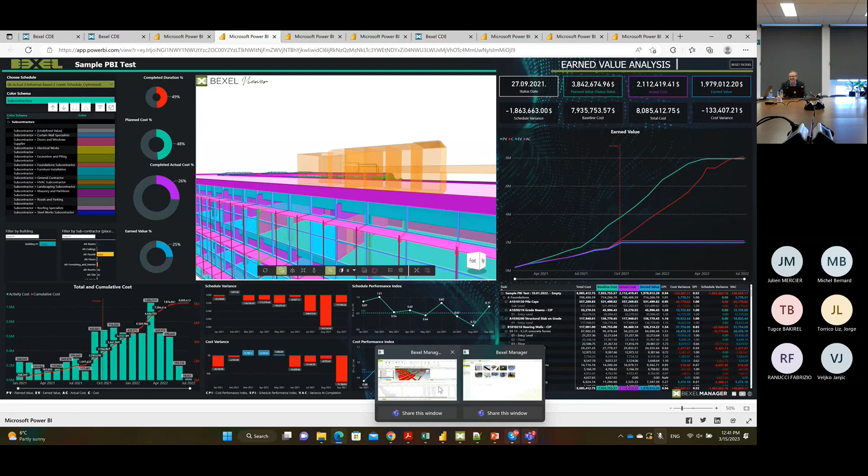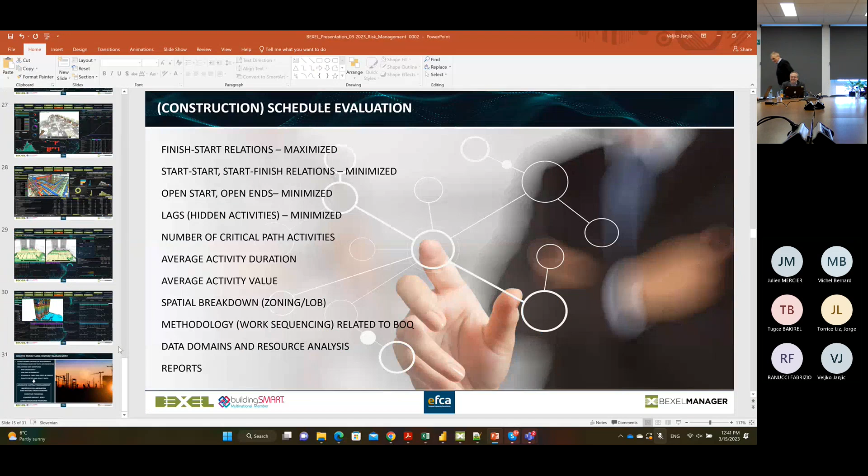No, I don't want to go into this. I want to go back to another point, how to implement this. It's not a sales meeting, that was not the goal. I want to go here just to say how to implement this, because this is important. So if you have an extremely well defined scope of work, if you invest slightly more time in this - not mentioning any software, this is not about the tools, please - you can be on the safe side.

Just a recent example, we are working on a headquarters for the police and Ministry of Police in our country. If you talk with the national company who managed that project, if you ask the CEO of that company, he said that he's completely relaxed now and on the safe side because everything was defined. And he can talk with the contractor, the designer, the project manager. He's the end user. He's saying, I have everything.

And there is no way around it, because if it's not clearly defined, if you mention just 5D BIM, it's literally, like you said, nothing. But you need to agree, because most of the time what we face is that it's difficult to bring your clients to this advanced contract management, because they are more in a classical attitude. They're very happy when they see a Power BI presentation.

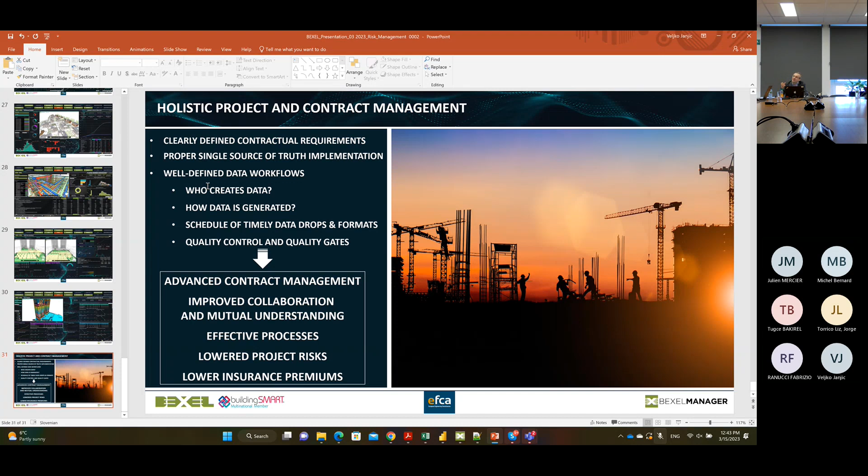Yeah, but the problem with it is liability, because, for example, we are in engineering and we are actually part of that process. And specifically for very large projects, we are there for years sometimes. And you cannot, after 2 years of work, go back to step one when the client says, okay, I changed my mind, I'm not happy with the result, go ahead and redo it for free. I'm not going to pay you because you had to do it right the first time.

And then it becomes very important, what you said, to have these approvals on the continuation of the process. And I like that very much in this approach, although you need a client that is willing to participate in something like that. If your client says, well, okay, do whatever you want, but still after 2 years I'm going to decide if I agree with you or not - no, but this is not even according to FIDIC law. Yeah, but FIDIC doesn't exist sometimes in some countries. But that is, of course, a very important thing.